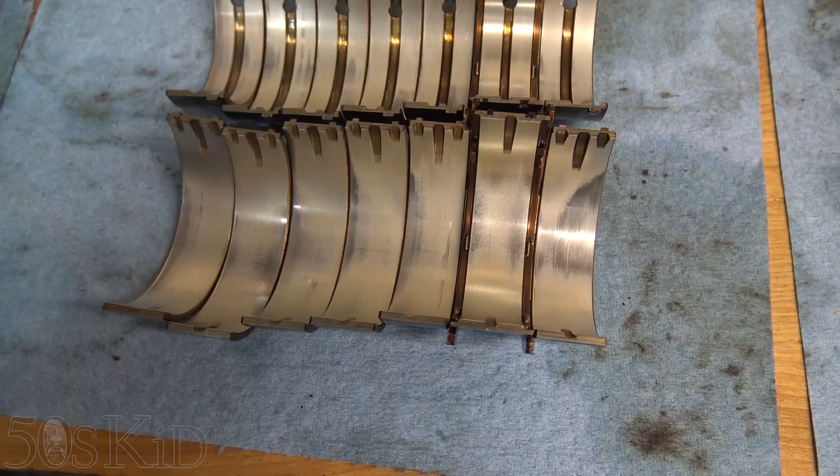So let's get started. We're going to start by examining the main bearings. This is main bearing number 1, closest to the front of the engine. Number 7, closest to the rear. These are the lower bearings. As the engine sits upright in the car, these bearings are on the bottom. These ones are on the top. So number 1, this is basically where the little tangs are. This is the exhaust side of the engine. So basically the tangs always match up.

So I've split them open like this and unfolded them. That way you can tell, when you look and you see this sort of shiny wear on a side, if I were to flip the bearing the wrong way, it would actually look like tapered wear had occurred, as if the crankshaft had been bent, but that is not the case. You've got to keep your bearings oriented correctly and realize that this is the front of that same bearing. When they were together, they were like that. So it's important to keep your orientation correct.

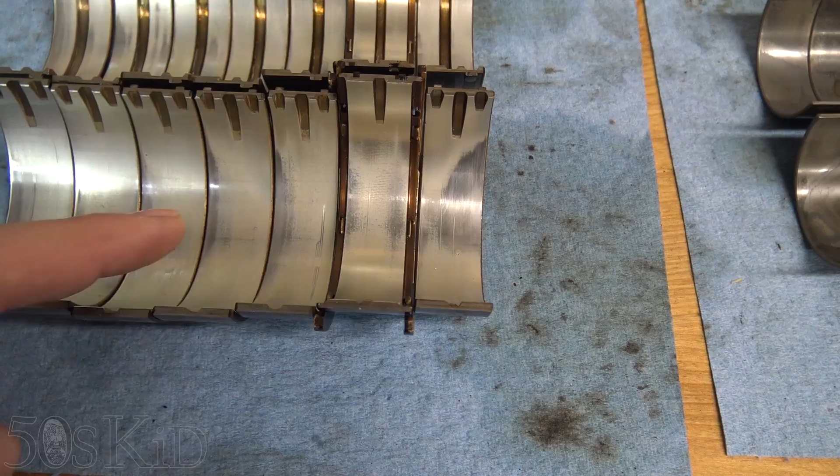Now, one thing you want to look for overall when you line up your bearings like this is more wear in the center bearings, particularly the most center bearing. More wear there than the others. If you see heavy wear along the center, that's evidence of a bent crankshaft. But I'm not seeing that here, so that is very good. This shiny wear, on a normal kind of bearing, would actually indicate oil starvation. However, these are actually aluminum bearings, and this shiny area is just the normal wear pattern for them. So I'm not too worried about oil starvation issues.

The only thing I'm really worried about are 2 things. Number 1, you can see that there's a little line right here, and I can actually feel that groove with my fingernail. So obviously foreign material got in there and caused that groove. And there's another little one right here that I can barely feel with my fingernail. I'm worried that that foreign material might have also damaged the crankshaft's journals, so I'm definitely going to inspect those pretty closely. The top bearings are better than the bottom bearings because the bottom bearings take the major thrust load.

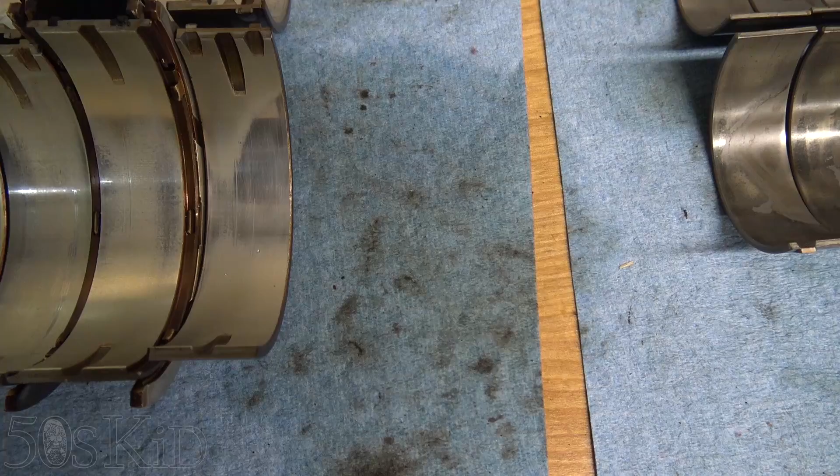The other thing I'm really worried about is this bearing on the end here. That's just kind of an unusual wear pattern that I'm seeing there. It's way heavier than all the rest, obviously. But at this point, I'm hoping that was probably caused by the damage to my transmission when the oil pump bearing spun out on my transmission. I guess that was earlier this year, so I guess that was a year ago.

What would have happened is the torque converter, you see the end of the torque converter bolts here, and the other end of the torque converter is sticking into the transmission here, and it's riding in that bearing. So once that bearing spun out, the torque converter might have been able to oscillate this way. I'm thinking maybe it was oscillating and gravity was pulling it down, and that's what caused this wear pattern here. So that is my theory about that. I have no idea if it's correct or not.

The next step from here is going to be to examine the crankshaft and see if this wear pattern has caused any kind of tapered wear on the crankshaft or anything like that. But we will do that in the next step. So before we go there, we're going to take a look at the connecting rod bearings next.

So these are the connecting rod bearings, again, number 1 through number 6. These are the cap bearings. So again, up in the car, these would be on the bottom. These would be the lower half of the cap right here. And these would be the uppers. And I've labeled each one. Very important to label each one, by the way. So those would be the uppers.

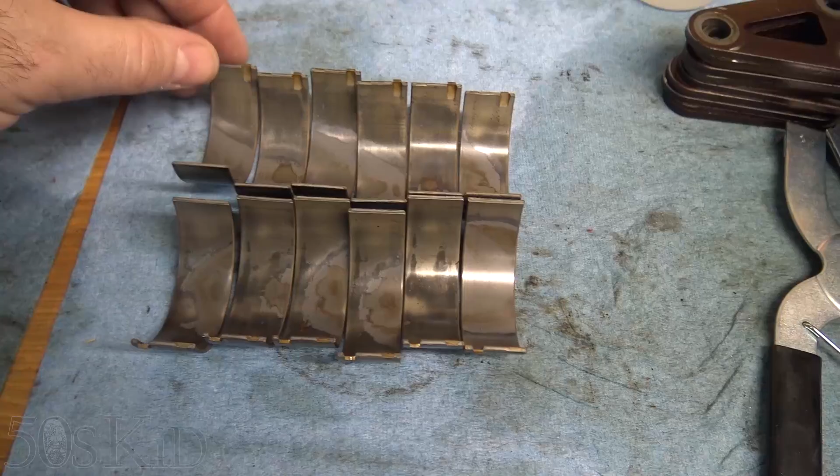Now, when it comes to connecting rod bearings, the uppers are the major thrust surface, so you should expect to see greater wear on those, which you'll notice I don't really have greater wear on those overall. In fact, on this one, for example, the wear is greater on the bottom one. So that kind of doesn't translate to my particular set of bearings here.

Again, I've kept them in orientation the same way, which in this particular case is extremely important because, as you can see, the biggest problem that we're seeing here is the tapered wear across all of these bearings. You can see they all have tapered wear. It's tapered this way, except this one. This one doesn't really have it. It's showing sort of a different kind of wear over there, but this one, even though it looks like it's even up here, you can still see there's taperedness on that bearing as well.

And we also see the taper on the upper bearings as well, and you'll notice, because I've kept them in orientation, the taper is going the opposite way. So whereas it's tapering out this way on that bearing, it's tapering out this way on that bearing. So when this bearing was like that, you can see that that's the wear there, but then it was just the opposite on here.

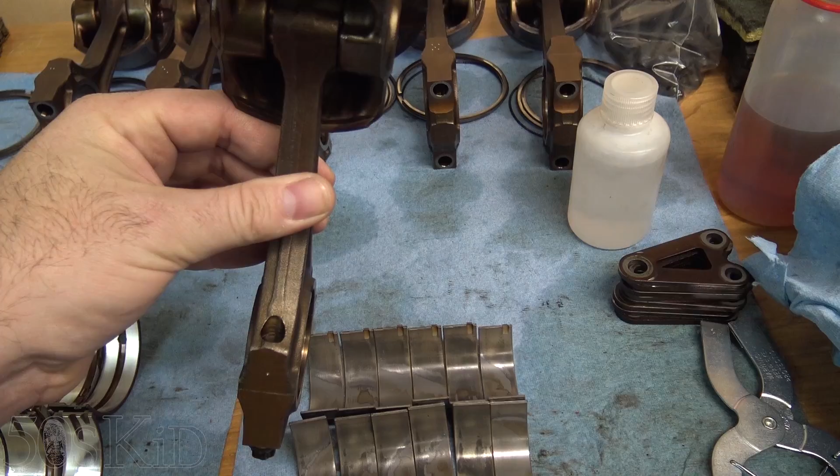Now, what this means is that very likely this connecting rod got bent this way. Is that the right way? Actually, no, it would be this way, because that bottom bearing would be pressing up against the crankshaft here. And then that top bearing, you see the wear pattern is on this edge. So that top bearing would be pressing down on the crankshaft this way. So this is a very exaggerated version of what happened, but this connecting rod, and I think all of these connecting rods, probably got bent this way somehow. So that is the situation that these bearings are telling us.

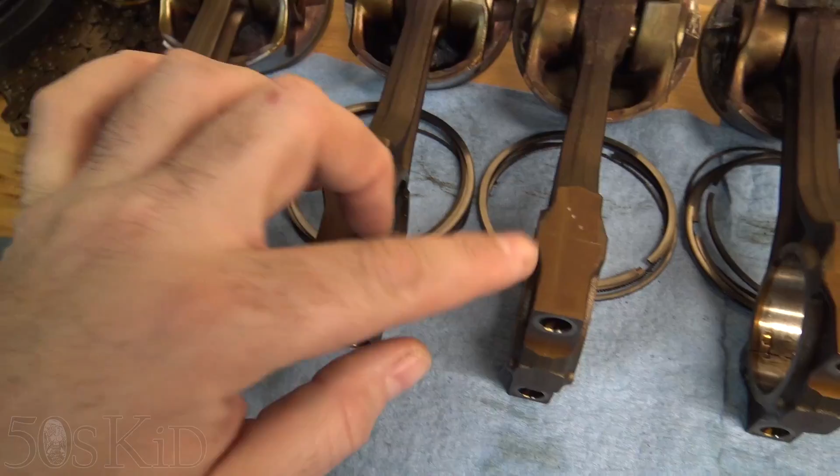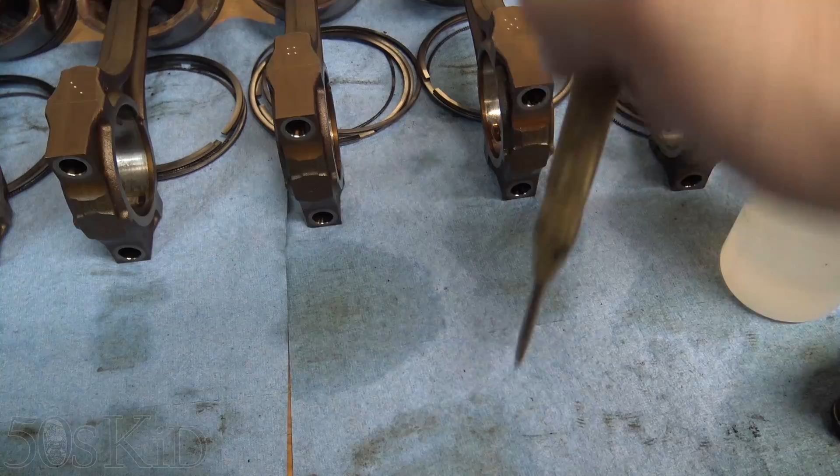And you'll notice that I've marked the connecting rods. They've got these little marks here, and I made that just with an automatic center punch right here. You just hold it down, press it down, it releases a spring and it makes a little punch mark. It's for when you're drilling in metal, you can make a little dot, and that way your drill bit won't walk. So you can use one of these to mark it.

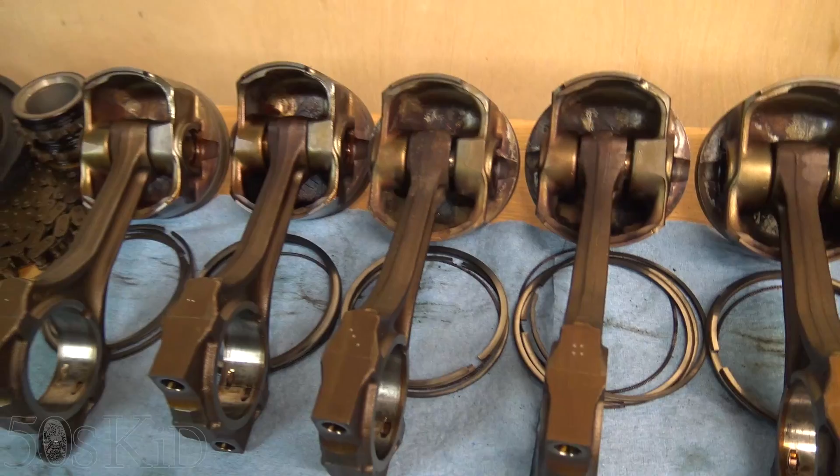There's probably going to be debate on that. After I did this, I finally found a paragraph in my engine rebuilding book that said beginning machinists do this without realizing that it could cause stress risers in the connecting rod. I don't know if that was just powdered metal rods only or what, but I have seen this done in many other places, so I don't know. It's up to you whether you should do it or not. You can always just use a Sharpie, and then when they get clean, somebody can just re-Sharpie the number on them if you just don't want to mix them up.

By the way, guys, in case I didn't mention it, all these bearings are getting replaced. If you see any shiny areas on an aluminum bearing, or if you see any kind of wear pattern like this on a connecting rod bearing, which I think is a tri-layer bearing on these, time to replace them. Bearings are your wear item. Bearings are what get replaced.

We need to get the connecting rod off of the piston. Luckily, these are not pressed in. They're free-floating piston pins or wrist pins. There's just a little circlip in here that you need to get out. So you can just sort of pry that sucker out.

And you should be able to press it out, but of course the built-up varnish might give you issues, so you can just knock it out with a little hammer if you need to. So here we go. We need to figure out if it's bent or not.

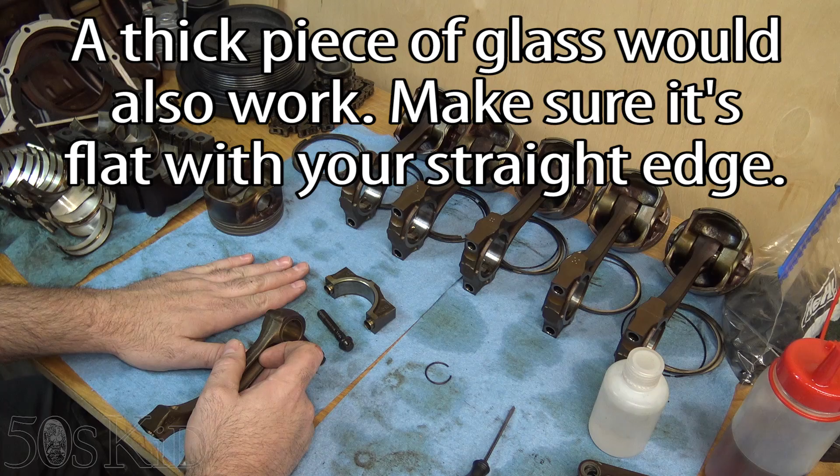And when I say machined surface, I mean a metal, like a cast iron machined surface, such as the surface of my table saw, or I could have used my jointer as well if it wasn't packed away, but you're going to need a machined surface. So let's go use my table saw and see what we see on this connecting rod.

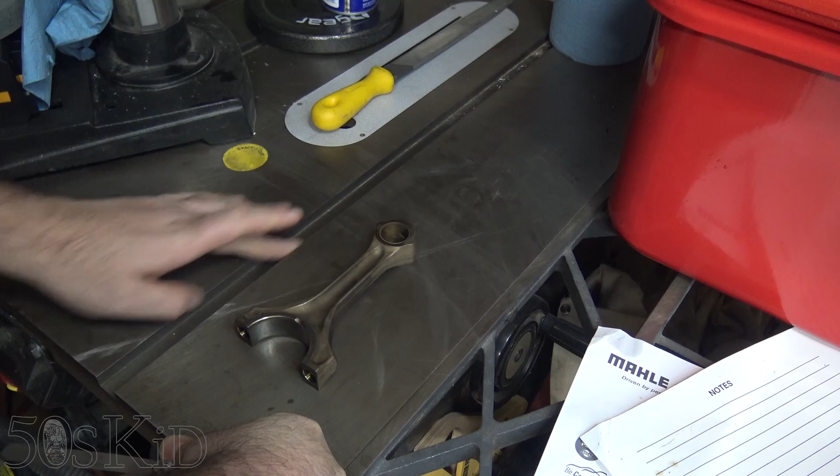Okay guys, so this is a little interesting. I always go through all these things when I'm doing these videos just to make sure that I know the direction I'm going in for the entire video. So obviously I've checked all of this before, a couple weeks ago actually. And when I checked this connecting rod on my table saw here, I noticed that there was a rocking in it, which you can sort of hear.

And if I press down on this end, you can see that I can get a 1.6 thousandths feeler gauge in there on the bottom like that. And if you turn it over, can't really get it in. But I'm realizing that when I move it up here, I don't get the same effect. And there's no rocking sensation over here. And when I just checked this now, this is what I saw.

And I figured it must have been because it's so cold here in my workshop. I'm shooting this at night right now, and it's winter time. So I figured the temperature change was affecting the metal somehow. Metal expands when it gets warmer, just like everything. So I soaked this connecting rod in hot water for a couple minutes and heated it up, then checked it again, and I found the exact same result you just saw. At this point, this thing is room temperature for inside your house.

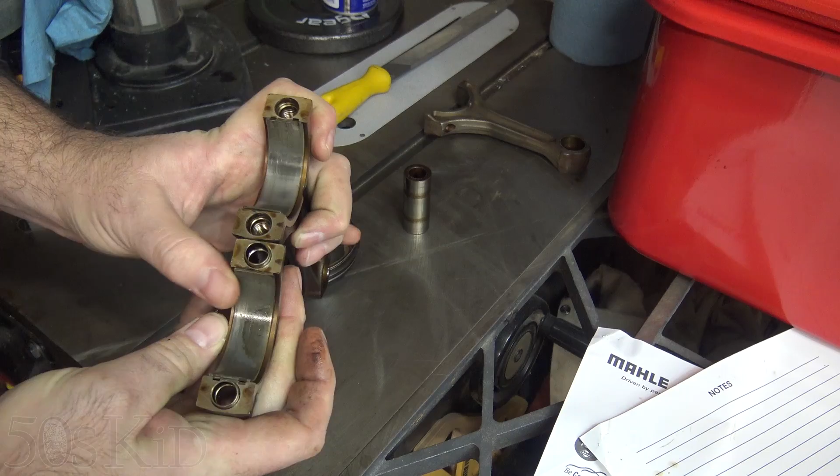Okay, so here is number one connecting rod and piston from the used engine that I purchased. And the most interesting thing to me about this is the bearing wear. Take a look at this. You can see that on the bottom cap, we've got tapered wear right there. But on the top cap, the wear is completely even. So that's, again, really interesting. This came out of a 528, I believe. Same pistons, by the way.

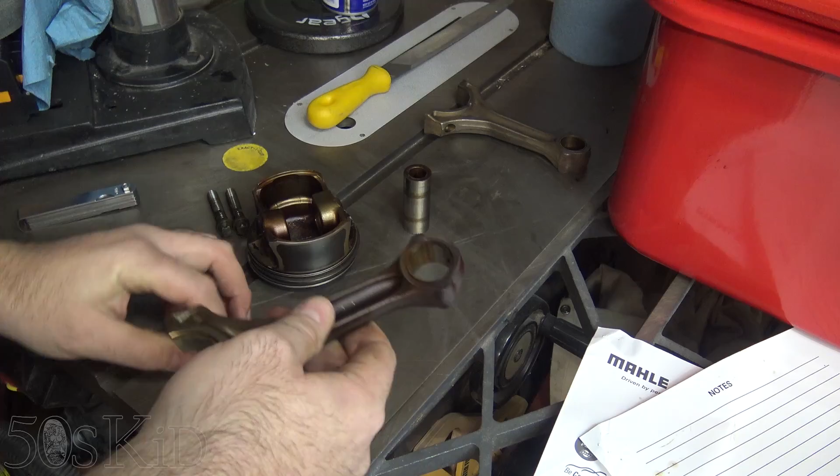528, 328, same connecting rods, I should say, as the 330. Different piston, same connecting rod. But that was the wear pattern. And what I did in the junkyard was I took these connecting rods, and the only machine surface I actually had was the engine that was flipped upside down. So I just put it on the edge of the engine where the oil pan gasket goes.

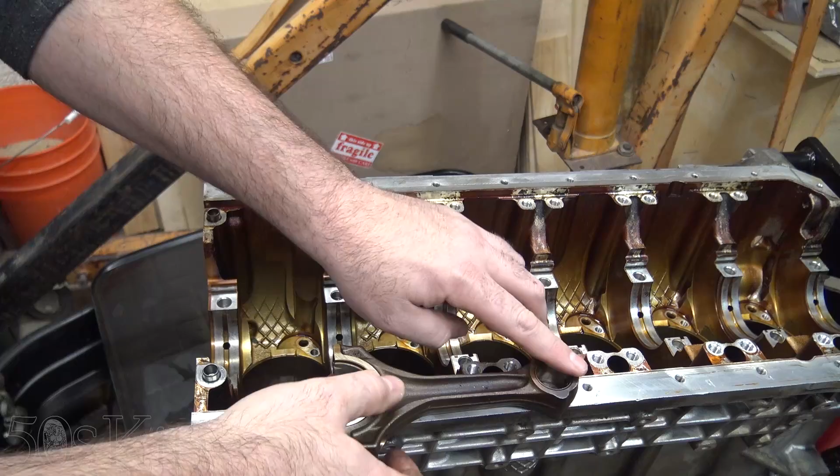Let me show you that. So I did this in the junkyard. I just sort of put it on this machine surface and tried rocking it, and didn't see any rocking out of these. So I assumed these were good, and I bought them specifically because the upper bearing had completely normal wear, and this is the thrust surface. So I guess at this point I might not be using these based on what I'm finding.

I'm going to go ahead and check every single one of my original connecting rods and just make sure that I'm not getting any rocking out of those. And then what I probably should do is put my straight edge on my table saw there and figure out if we've got any taper on that surface at all.

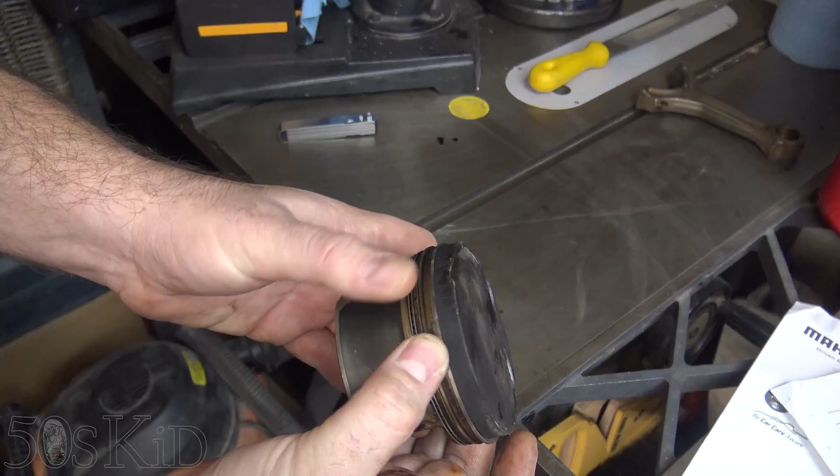So let's do that. By the way, quick look at these pistons that came out of the 528. Hopefully you can see right here, there are lots of vertical scratches along the skirts of the pistons, and it's like that on all of them. These pistons are in much worse shape than mine were. So, quite interesting. Of course, if you have any vertical scratches like that on your piston, junk it. It's junk, you need new pistons.

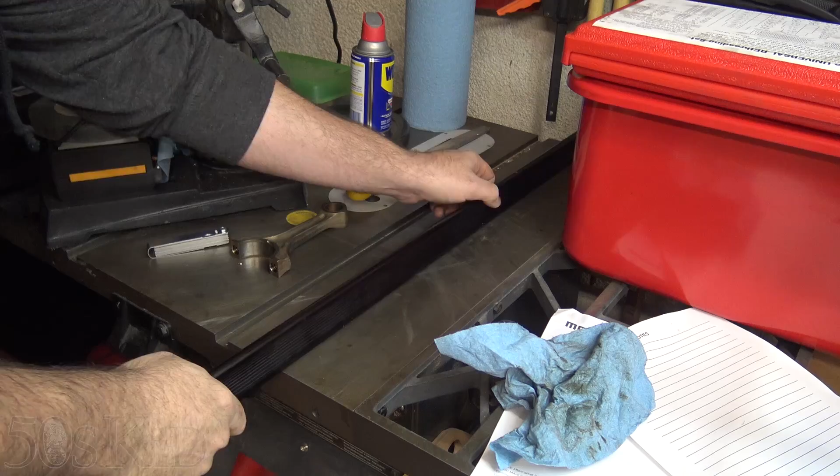You know guys, I could swear I remember checking this surface with this straight edge to make sure that I did have a straight surface. I mean, look at that. Hold on, let's do that this way. You see, this feeler gauge is not going through. It's going through there. So, if anything, we've got a little dish in this area right here, all the way to here. Yeah, that's right. That's what I remember from last time. This is actually ringing a bell.

And then it gets through back here in some areas, but then it doesn't want to get through up here. That's interesting, because you can't really tell based on that, well, I guess you can. If we're comparing outside edge to outside edge, over here we've clearly got a pretty flat surface all the way to there. So if I'm just checking the connecting rod here, I can't get the feeler gauge through. Okay, I'm remembering that. Let's assume that this is the flat surface, because that's the flat surface right there.

So yeah, see, that's what I was doing. You just saw right there, using my flat edge and a feeler gauge, that this area right here is definitely flat. I couldn't get a 1.6 thousandths feeler gauge in there. But now if we put the connecting rod there, you can clearly hear the tapping. It's very, very slightly bent that way. So if I just hit it here, I can get the 1.6 thousandths in. Just barely though. It's a very, very small amount.

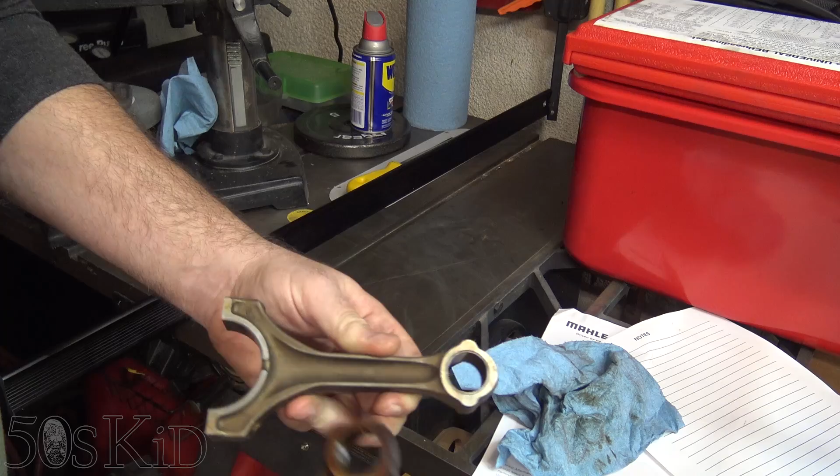I almost feel like putting this in the water too, because that water actually cleaned off the surface varnish, did a pretty good job. I'd have to heat the water back up, but let's go here. See, nothing there. Nothing there. So, okay, right there.

Physical evidence. We have it on camera that this connecting rod is absolutely better than this one. This one has a very small bend in it. Very, very small, but big enough to actually cause tapered wear on its bearings. So cool, I did not waste money. I'm very happy, and you guys saw it. Proof positive. This is number 2 of my old connecting rods, ones that came out of my engine.

There wasn't actually tapered wear on these bearings on number 2, if you recall from that scene a couple minutes ago in the video. This one didn't really have that kind of wear. So I'm not surprised that it's not exactly bent. See, it's fine. This one seems to be fine. Maybe there's a very, very small amount there. Yeah, you can get that feeler gauge in right there. Very small amount.

Here's number 3, old bearing, old connecting rod that came out of the engine. Let's figure out which side is which. The numbers that are stamped into the connecting rod, that's the exhaust side. And I do believe that the taper was coming this way. So we should find that it's that way, which we do. So if I'm putting my exhaust side here, which is the numbers that are stamped in, not the numbers that I stamped in, not the little 3 dots, that's the intake side because there was nothing there.

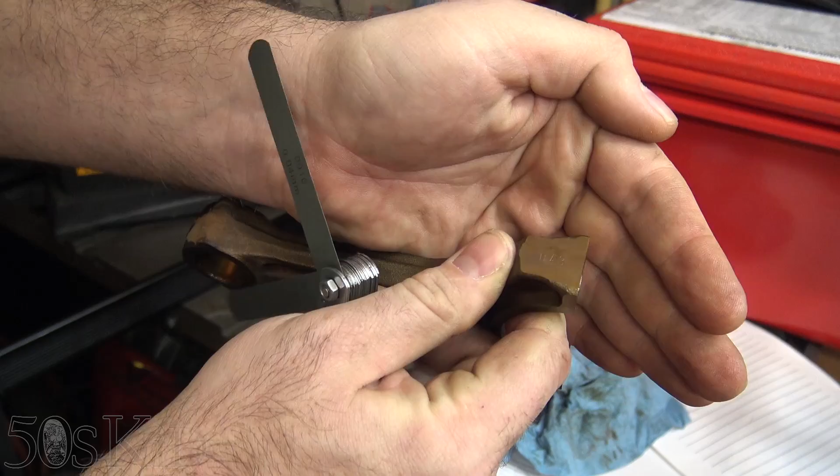On this side, there are numbers that are stamped into each connecting rod, and there are matching numbers on the cap. That's the exhaust side. So if I'm putting that side here, that's the side that's going to rock like that. And I am consistently finding that it's towards this side, which is, you know what I'm going to say, interesting. Let's get the other 3.

Okay. This is number 4, and we expect it to be on this side. There we go. And if you were to check it on that side, there we go. We can clearly see that one is bent as well. Number 5. Same thing, not as much there. Number 6. That one's not as much. That one I can feel more drag right here. But yeah, once I get in, then that's it. So it's a very, very small amount. Very slightly bent.

I'm absolutely certain that they can correct this at the machine shop. The reason that I chose not to do that is because it was probably going to cost too much. I didn't spec it out, but the cost on buying those used connecting rods from the junkyard was like $14 each. It was just the connecting rod and piston together. So I figured that they were probably going to charge me more than that at the machine shop, and even then I didn't know if that would weaken the rod at all.

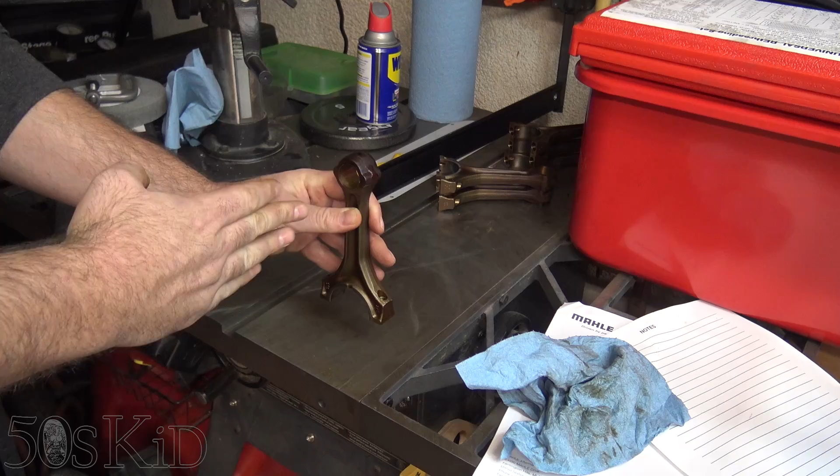The procedure they would use to bend it back is they're going to put the wrist pin back in, clamp it in a vise, and literally put a really long hardened rod in and just use leverage to bend the thing up past the middle point, and then it'll spring back to the center. And then they would use that fixture that I was talking about to measure it and make sure that it's perfectly straight again. So I didn't want to opt for that because it was particularly easy or cheaper to get a used set of connecting rods. So that's what I opted to do.

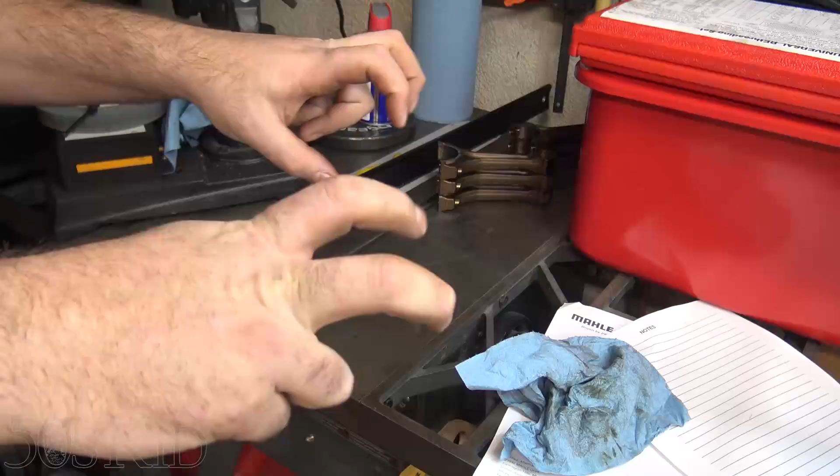I did check each one of the new connecting rods in the junkyard using that method I showed you. I used the machined surface of the engine, but I suppose we should go ahead and check every single one on here just to be absolutely certain, even though I did check all the bearings, and most of the used bearings all look the same, where the cap bearing had that tapered wear on it, but the top bearing did not, which again, I find really, really strange.

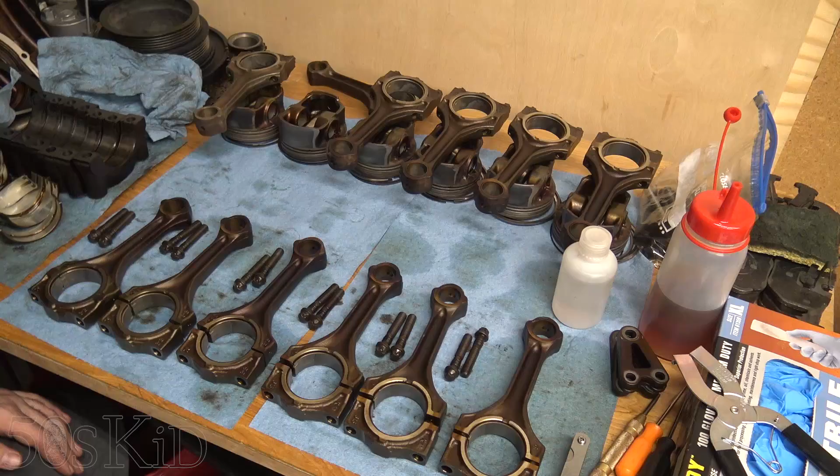I do not have an explanation for that at all. I will freely admit I don't know enough to know what the explanation is. Something to do with the twisting forces inside the engine. I have no idea. But I will check each and every one of them on this surface here and make sure that they are good before I put them into service. Okay, I have checked all of my new connecting rods and they are all good. So cool, that problem is solved.

Basically everything up here is just junk because I'm getting new pistons. They come with new wrist pins, new clips, new piston rings, and here are the new connecting rods. So literally all that's junk, but of course I will never throw it out. I'll stick it in a box somewhere because I'm that kind of pack rat.

I just want to mention something. If you're reusing your pistons and you go to clean them out and dunk them in chem dip or solvent, you need to take them completely apart, because you can see this little varnish area right here. This is the part that's actually exposed when it's in there. And if you don't take them apart when you clean it, some of this varnish could actually flake off and then get in between the wrist pin and the bearing surface inside the piston, or the bushing inside of the connecting rod, and that could actually cause it to jam up. So you definitely need to disassemble everything before you dunk it in solvent to clean it.

So let's move on to checking the crankshaft next. Make sure that none of our bent connecting rods actually wore a taper in the connecting rod journals on the crankshaft itself. Hopefully all of the damage was contained to the bearing. I think that it might be. And we want to scrutinize the number 7 journal and make sure that this particular wear right here didn't cause any kind of a tapered spot on the main bearing journal on the crankshaft. So let's take a look at that next.

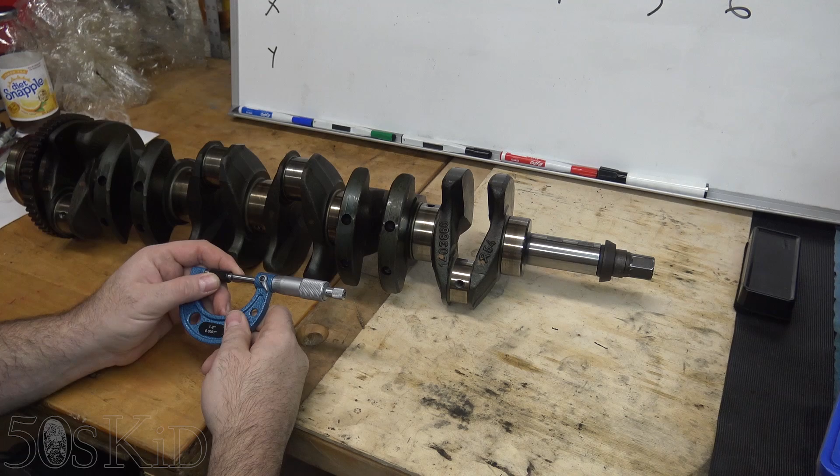I'm actually reshooting this video because the first time I shot it was at night and everything was really cold to the touch, and it's wintertime right now. And the measurements I was getting were smaller than when I first mic'd this crankshaft a week or two ago, when I first did all of this stuff just to see what was what. And I realized that that temperature difference actually changed things quite a bit. So I'm reshooting this. It's warmer now. It's during the day. This is a warm day.

It's like 73 degrees outside, and I've actually had the crankshaft in my house, wrapped up in plastic, wrapped in a blanket, just making sure it's room temperature, because that's what you want. You want to have it at room temperature. You don't want to have it freezing cold to the touch or anything, because there was a significant difference. It was 3/10,000ths smaller on the crank pins, and I think 2/10,000ths smaller on the main bearing journals. So pretty significant. So we're just going to go ahead and reshoot this part here.

Now I'm making sure that my outside micrometer is zeroed with my standard, which is a good idea to do every time you do this, because again, temperature changes. You want to make sure that you know what your equipment is reading, and correct it if that's your choice, and or write down the error, and that way you can subtract the amount of error from your measurement. So in other words, if you were to put the standard in there and it was reading 1/10,000th instead of exactly at 0, then you need to subtract 1/10,000th from your measurement. In this case, I was micing my standard, and then I just readjusted the micrometer to 0. And if you want to know more about this, just check out part 1 of the Blueprint series if you haven't seen it.

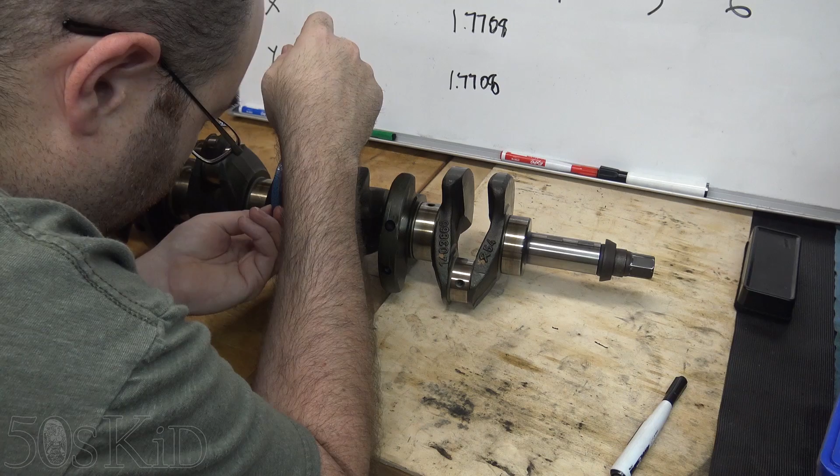So now I'm going to check the sides to make sure that they're not smaller. And I want to make sure that I don't come too far to the side, because there's actually a little radius right here in the corner. It's called the fillet. There's one on this side and one on that side. So you want to make sure you're not actually touching there. You just want to be right on the edge of the shiny part, which you can clearly see. So let me make sure I get in the right spot here. .7708. So that's good. No barrel-shaped wear on that side. Let's double check this side.

.7708. And just to cut to the end, when I did this last night, there was no tapered wear on any of the journals at all. So I'm not going to bother to recheck them again, because I know it's going to be exactly the same. So no tapered wear, even though those bearings were tapered. It looks like the bearings took all the damage and didn't actually damage the connecting rod journals, the crank pins. So really happy about that. I'm going to mic up all the rest of the journals, write the numbers down on the board, and we'll see where we are.

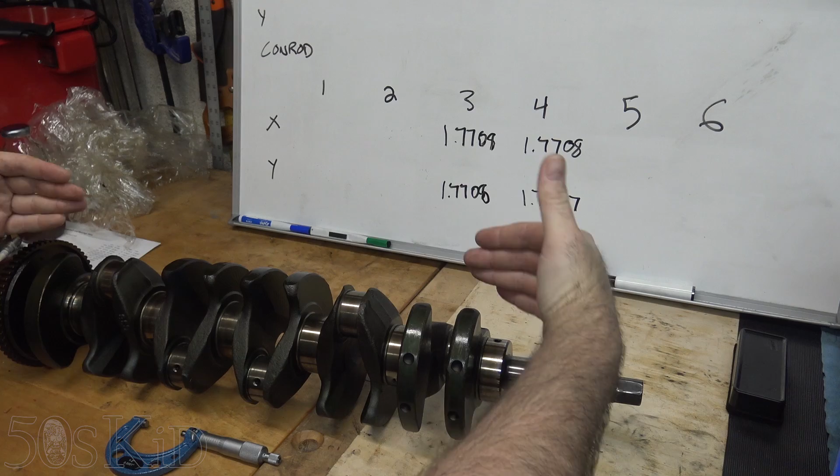And I just want to mention one other thing: when I take the measurements of each of the crank pins, I'm turning them so that they're vertical like this, just to keep some consistency for me, or just to make it easier, I guess. There is no top and bottom to a crankshaft. And I hope it goes without saying that you should wipe off these connecting journals with a lint-free cloth before you start, because a little speck of dust will actually alter your measurement.

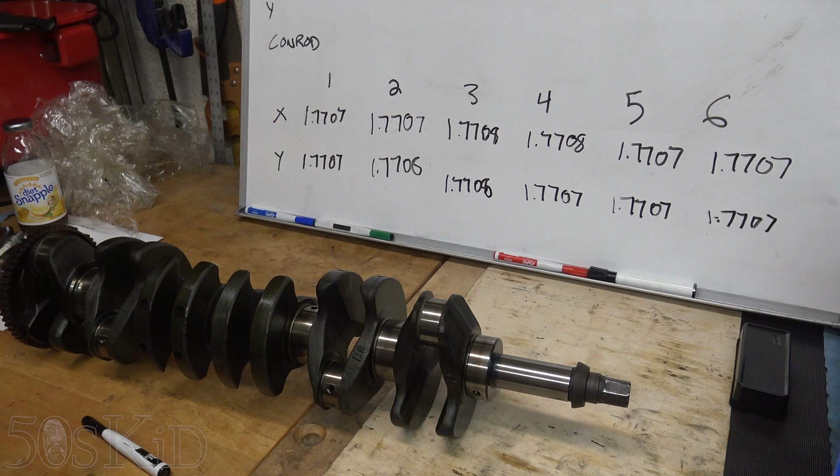So these were the results that we got for the crank pins. Pretty consistent with my first results, as far as I believe it was 2 and 4 that are showing just a very slight bit of out of round. You can see there's a difference of 1/10,000th between the X and Y measurements, which honestly you don't need to worry about at all, or I'm not worrying about at all. Anything that's less than 5/10,000ths is totally fine.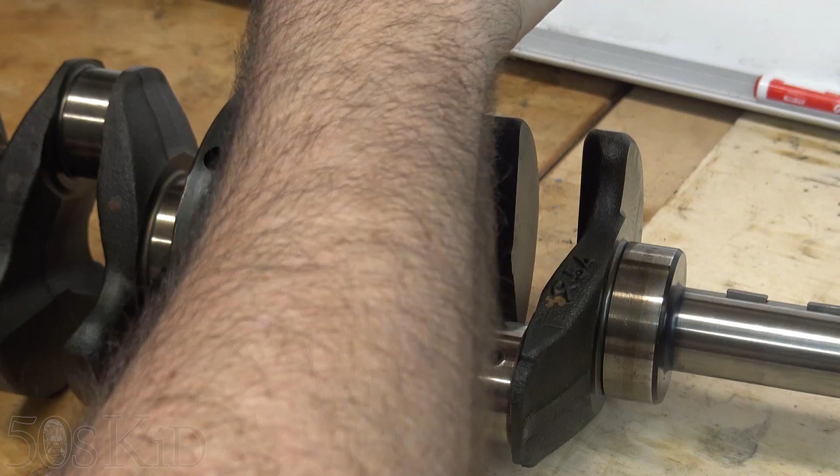Don't be afraid to take multiple measurements if you're not sure, if you're not getting consistent readings. Just don't be afraid to take multiple measurements, period, just to make sure that you're doing it right. Because this does take just a little bit of practice, but not that much practice. Once you do it a couple of times, you got it.

Yeah, so 2.3613. So now let's take the X measurement, again making sure that you're nowhere near the oil hole, which I've already done. .3613. Always good when you see consistent measurements.

Or you could also take measurements in 3 positions that are 120 degrees from each other. So you could measure an X, Y, and a Z if you wanted to. It would be an X right there, and then a Y, and then a Z or something like that to get a more accurate picture of your out of roundness. But I'm just choosing to do X and Y because I've found that this crankshaft is pretty consistently nearly perfect. Really happy with the state of this thing. I am not going to do anything to it.

One thing that I think I forgot to mention at the very beginning of the video, but with these journals, the first test you want to do before you even mic it is the fingernail test. You just want to see if you can feel with your fingernail any grooves or anything like that. Because if you can, then you want to have your crankshaft polished. But I have not felt that on any of these journals. They're all perfectly smooth. They're all really great. This crankshaft can definitely go right back into service. So I'm going to finish miking these up, and then we'll just analyze our numbers and see where we're at.

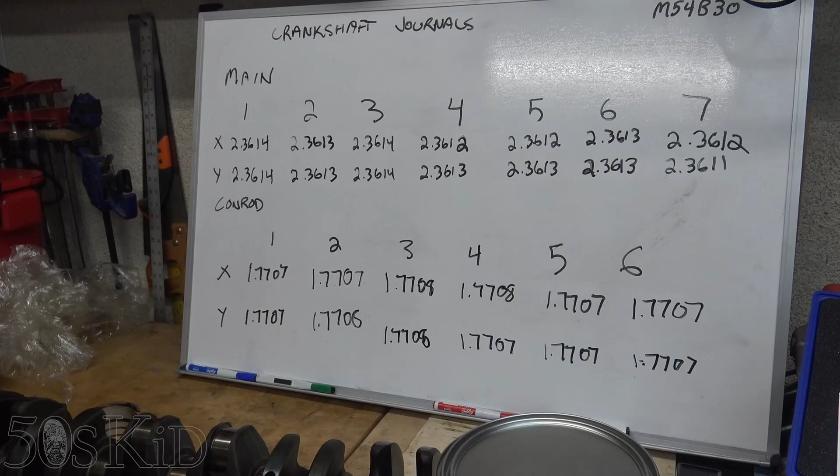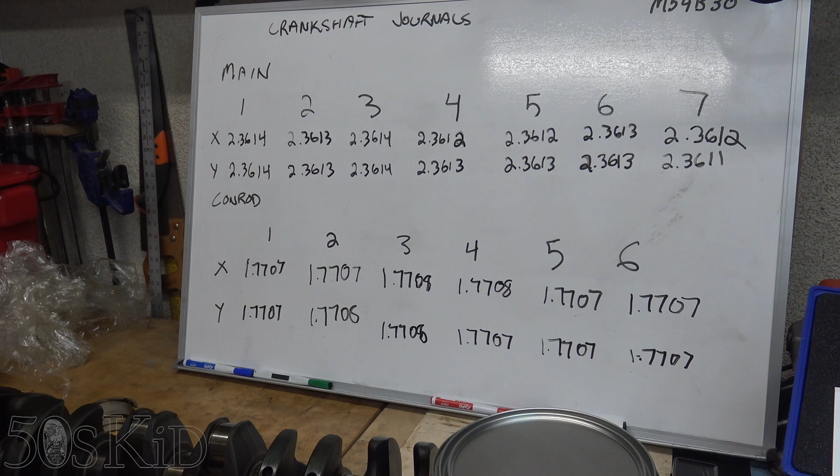So these are the numbers that I got, guys. And yeah, these are a couple of thousandths bigger than the ones I measured last night when everything was too cold. So these measurements are way more in line with what I was seeing when I first mic'd the crankshaft a week or 2 ago, before I dealt with the connecting rod problem and that whole thing and went to the junkyard and all that stuff.

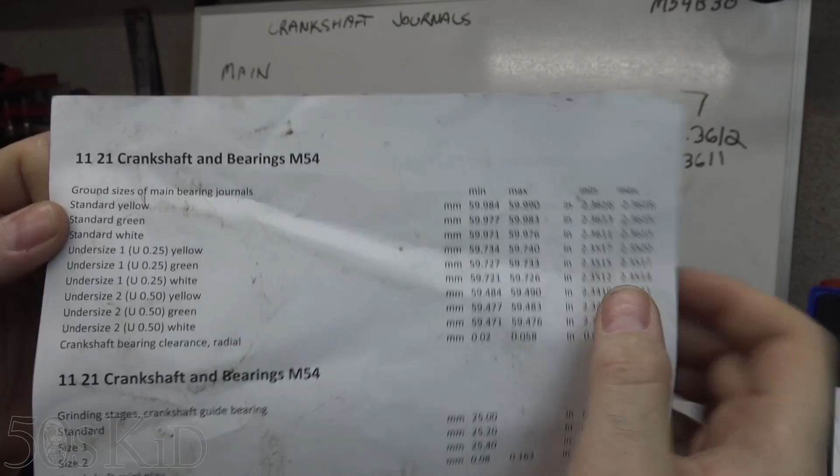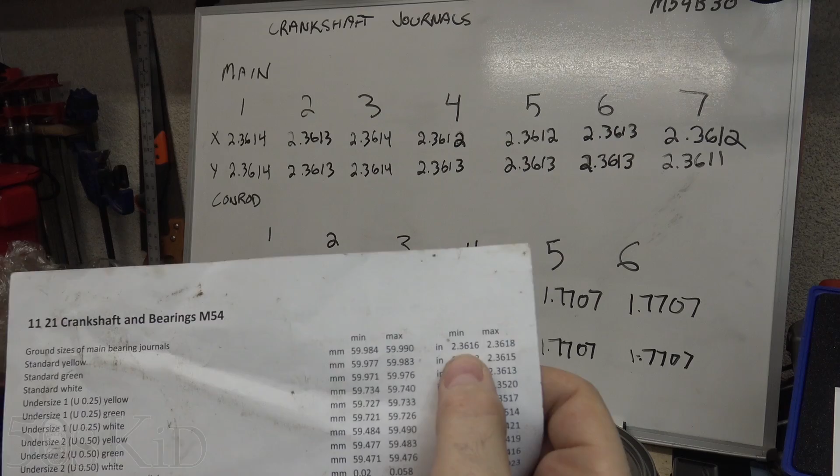The clearances for the bearing journals on the different colored bearings, if you'll notice here, we're talking about standard bearings because the crankshaft has not been reground, and you'll see the yellow bearings, which are supposed to be what this crankshaft has, because again, this crankshaft has yellow marks on it. So you can see the yellow paint marks on the crankshaft. The odd thing is that these paint marks are sort of closer to the crank pins. But the crank pins, the connecting rod bearings, don't have different colors for them. There's only one color. I mean, there is no color. So this is the confusing part.

Maybe this paint mark does not have to do with the size that these journals are ground to. There are a couple more paint marks on the other pins, or near the other pins as well. So maybe it doesn't have to do with these particular paint marks, and I'm thinking instead it probably has to do with the paint marks on the sides of the bearings, which I'll show you in a second. But let me just show you the wear for the yellow ones.

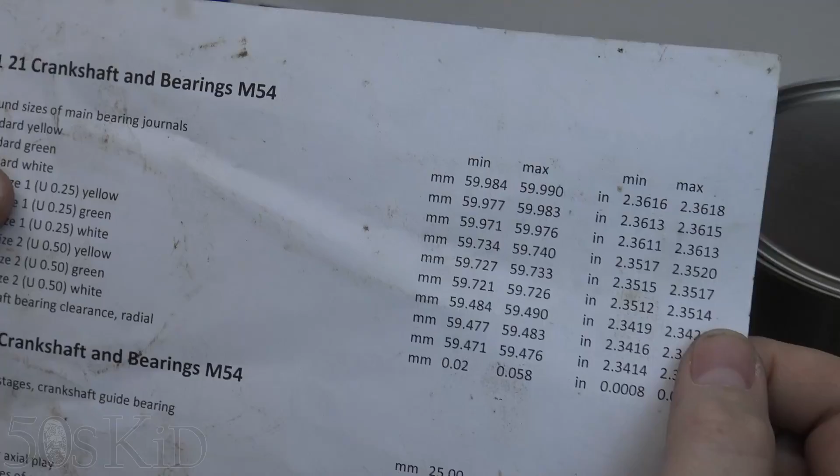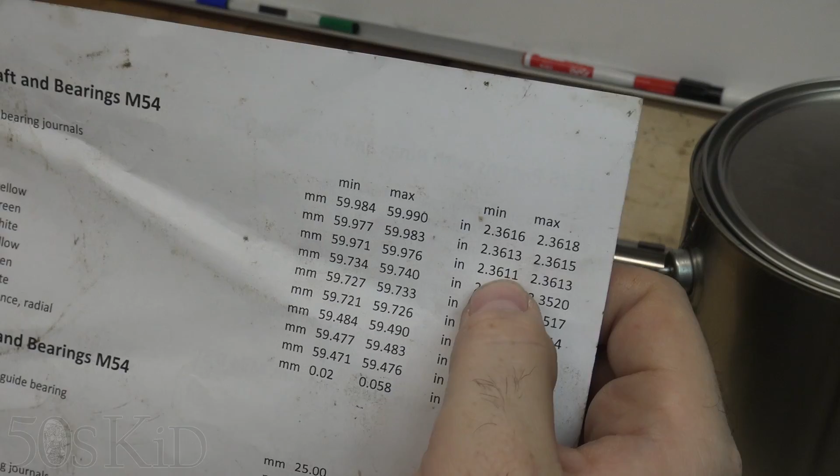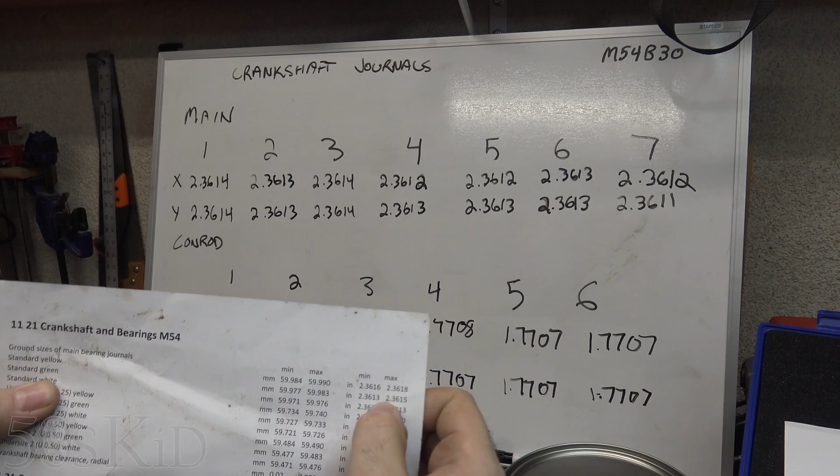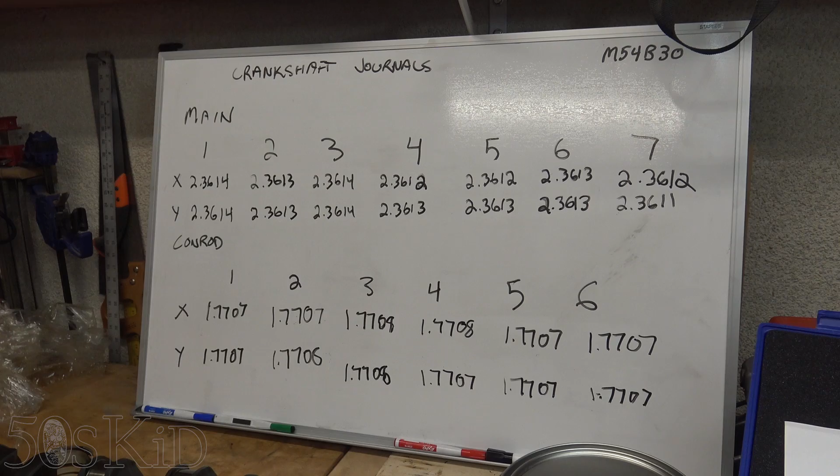So these are the sides of our bearings, and I'm hoping that we can actually see the color here. There does seem to be a color mark on some of them, and maybe this one's easier to see. Let me pull this out and kind of get it in some light.

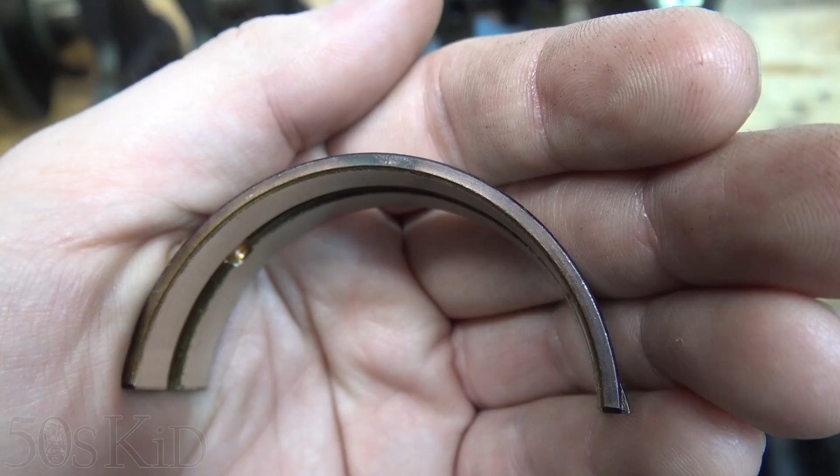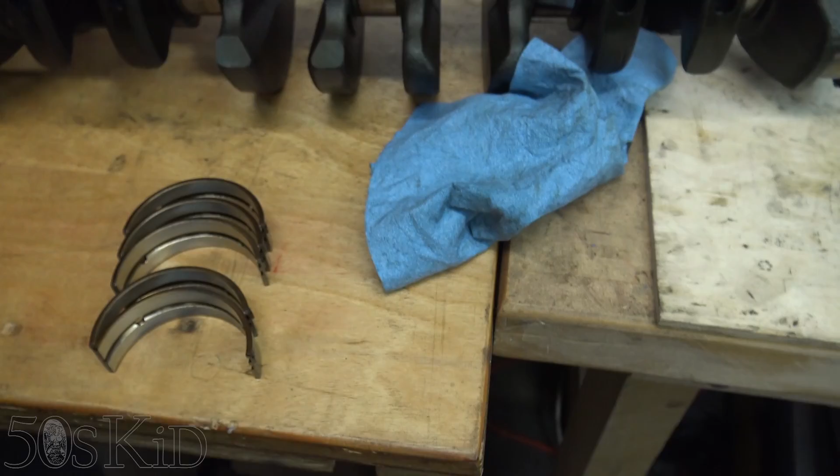You see that mark there? That looks green to me. There's no mark on the other side. It's very hard to tell because there's a lot of varnish on them, but I think I'm consistently seeing a green marking across all these bearings. So I think that means that these bearings are greens.

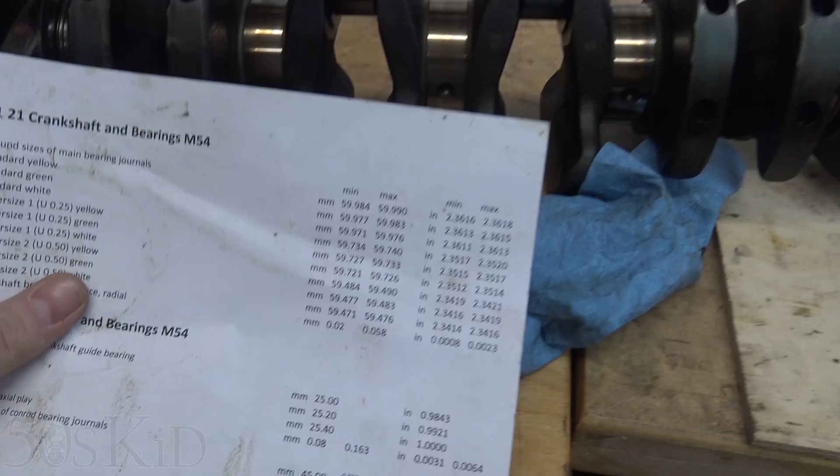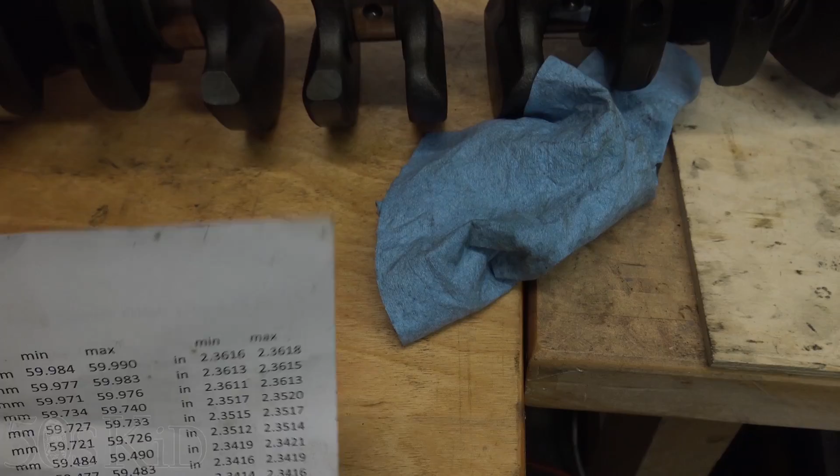And I think that means that I need to order new green bearings when I do order these bearings. I want to go ahead and confirm this. I want to see what the bearing clearance is on these bearings before I proceed any further. You see that the crankshaft bearing clearance radial is supposed to be between 8/10 thousandths and 2.3 thousandths. So I just want to verify that clearance on these old bearings before I proceed any further.

So I've put number 4 bearing shells back in and put the cap on. Bolts, I'm going to torque it with the proper procedure, which is first 20 and then 70 degrees.

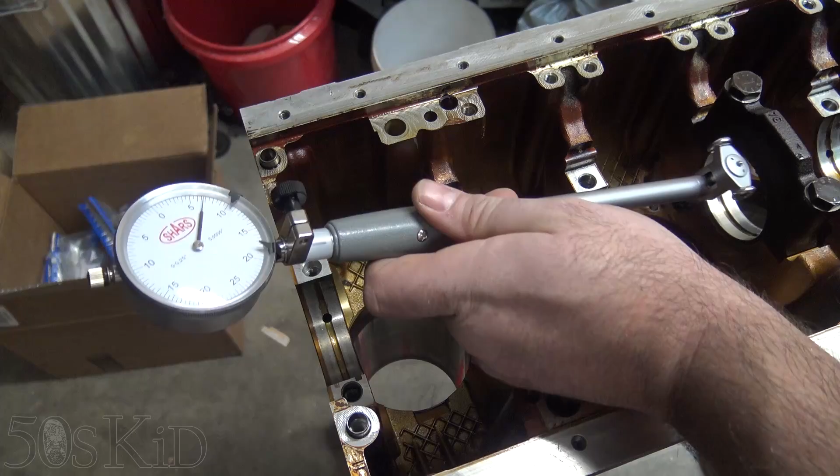So I've got my dial bore gauge zeroed out to 2.3613, which was the largest measurement I got of the number 4 main bearing journal. If you don't know how to do this stuff with the dial bore gauge, just check out part 1 of this video. So I'm going to go ahead and take a measurement here. Hold on, let's get this.

I'm going to take on both sides, because you see how there's this little oil channel right here. So there are 2 halves to each bearing. So I'm going to measure this half and then I'm going to measure that half just to make sure we've got some consistency. I'm going to do the front half first. Just get this in there. Rock this until we see it move. And you can see that we've got, well, it's less than 2 thousandths. It's 1.75 thousandths. Yeah, 1.75 thousandths.

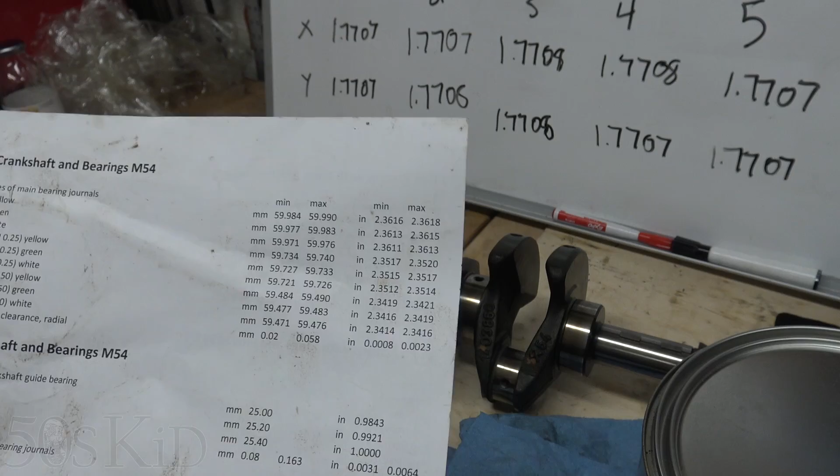And let's go over here to the other side. Tricky. So yeah, again, 1.75 thousandths of clearance. So we had 1.75 thousandths of clearance, and you can see that the range is between 0.8 and 2.3. So that would seem to be in line with what we're seeing. It does appear that these are green bearings.

So that sort of brings me to this, guys. This is a whole master rebuilding kit for this engine that I've already purchased because I did all these measurements a week or 2 ago just to figure out where I was at and what I would need to do. And basically, it comes with the oversized pistons. These are 0.5 millimeters over, or 20 thousandths. So we've got brand new pistons with new piston pins and locks as well, all the way across the board.

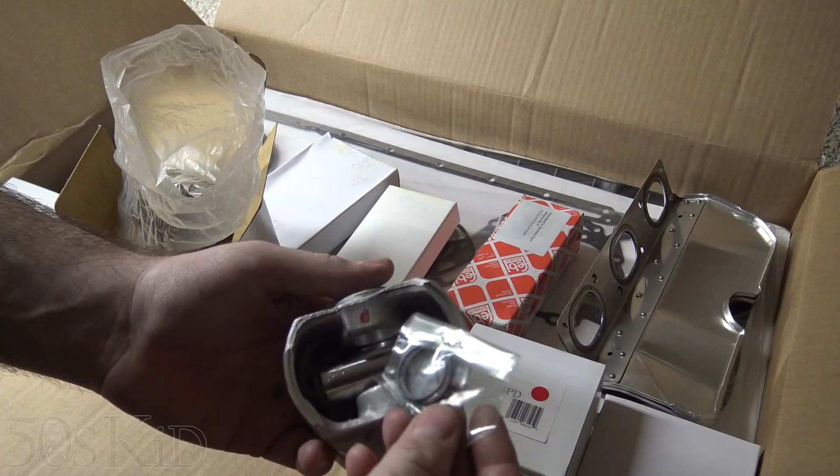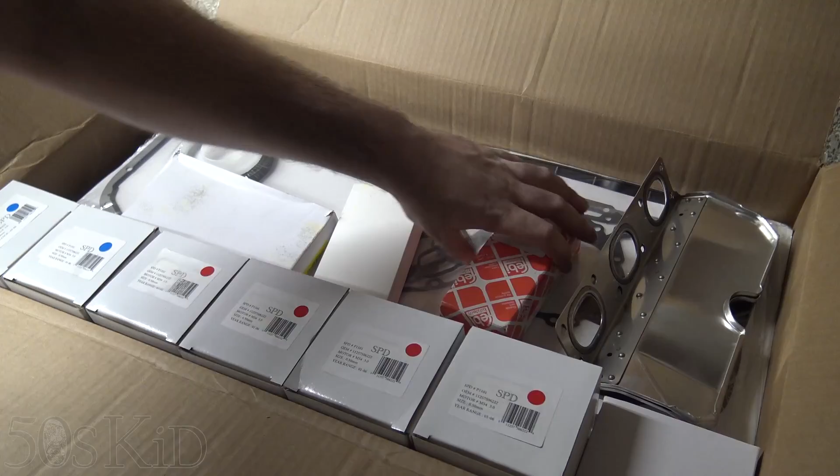So these are oversized pistons, and hopefully you can see they've got the 20 on them to tell you that they're 20 thousandths over. All oversized pistons are going to be marked with their oversizes. This is a pretty great kit. It does come with new head bolts as well, so I already purchased new head bolts before I even started the whole job, which I'm kind of bummed about, but whatever.

We got new piston rings. I believe these are Grant piston rings. These ones have the M54 style oil rings, but I've gone ahead and purchased the 3-piece M52 TU style oil rings from a different seller on eBay. I purchased oversized ones. It was the same guy that I bought my old rings from, the standard size rings that I thought I was going to be needing. He let me return them and get new ones.

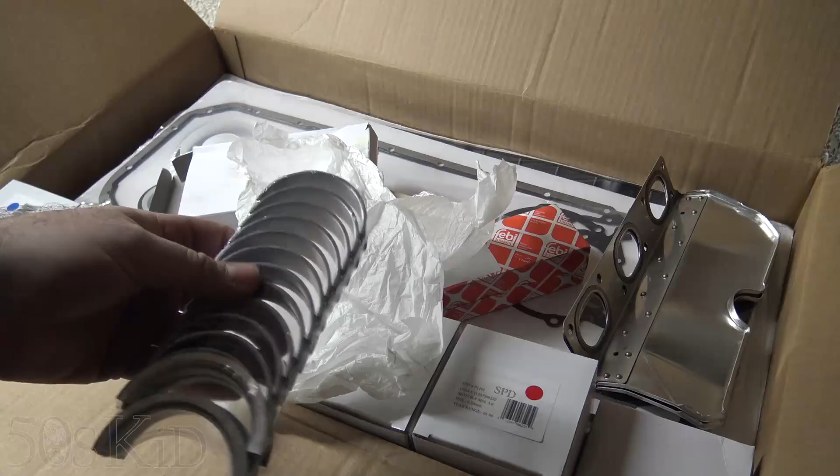This kit also comes with new bearings as well. And I was speaking to the seller, and they had a bunch of different oversizes of bearings, but they did not have the different colors with their particular bearings. So I don't know what the clearances are going to be on these bearings, because if my crankshaft journals are ground for green bearings, and if these happen to be like yellow bearings, the clearance might be a little too great with these.

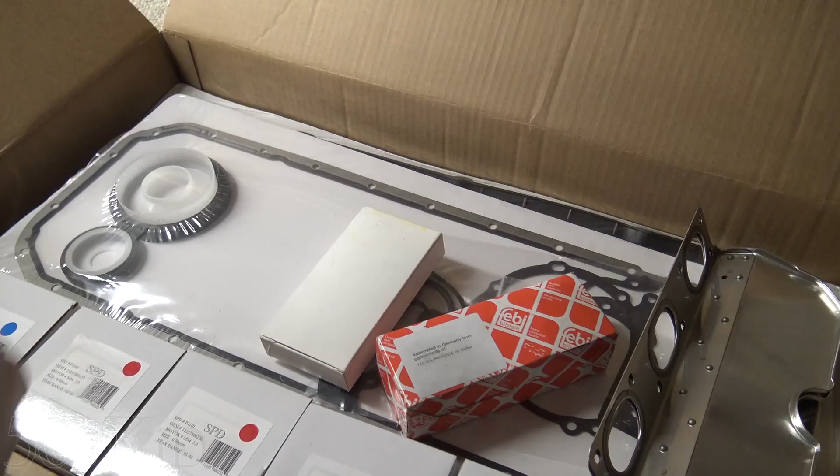So I think what I want to do is take these bearings and just measure them up and see what the clearances are right now. So I'm gonna go ahead and do that. By the way, this set also does come with every single gasket that you're going to need on the whole entire engine. It's got the exhaust gasket with the shield on it. It's got another oil pan gasket, all of the front gaskets.

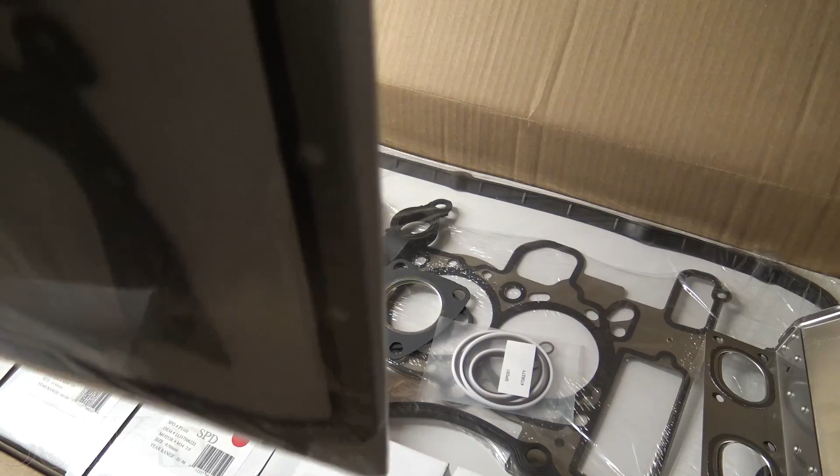It's even got the oil filter housing gasket. It's got the stuff if you want to rebuild your Vanos. It's got just every single thing, intake gaskets, all the exhaust gaskets. It has a new head gasket. It's just got everything, and it was $500. So the price was just right, honestly.

There was only one other seller. Well, this seller I could have just bought the pistons from for $300. And there was one other seller on eBay that had oversized pistons for $300 as well, I guess just a different brand. But this just seemed to be the best deal out of all of them.

New connecting rod bearings, and I think we've got new crankshaft seals as well. Yeah, new crank seals, both front and back. So you just couldn't beat this price, honestly. So I just went ahead and opted for this. So if these bearings turn out to be too big, it's not going to be too big of a deal. I'll just pick up some green bearings. I'm not too upset about it. I think I'm still coming out ahead because I just got so much with this whole deal.

Okay, so I've got one of those new bearings in there, torqued down to spec. So we'll go ahead and take a measurement of that. Looks like we've got 0.03 of clearance this time, which is too much. So let me move over to this side. Yeah, again, 0.03. Well, that's like 2.5, which is not good to have such a difference there.

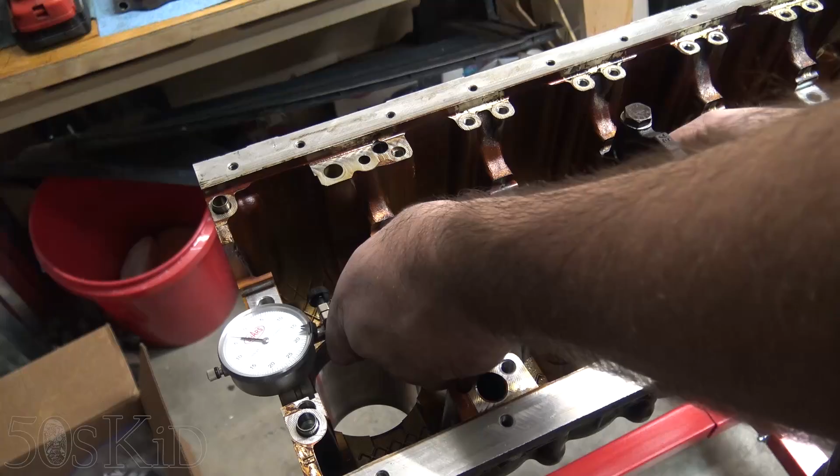Let's see if I was on it correctly. Yeah, okay, like 2.5, just a little over 2.5, or more like 3. Let's move over here, do it again. 2.5. Not happy with these bearings at all, so I'm definitely going to have to order some green bearings for this thing, just to make sure that everything's all right.

Now, I know somebody's going to drop a comment and say that I could have accomplished the exact same thing with Plastigage. And yes, you're absolutely right, but this is faster, and I happen to have these tools, so I used this tool. I will show you Plastigage, maybe in the reassembly video, just to show you how to do that as well. Yes, Plastigage is absolutely cheaper, but I have these tools to make more accurate measurements, and without outside micrometers, you can't check your crankshaft journals for tapered wear.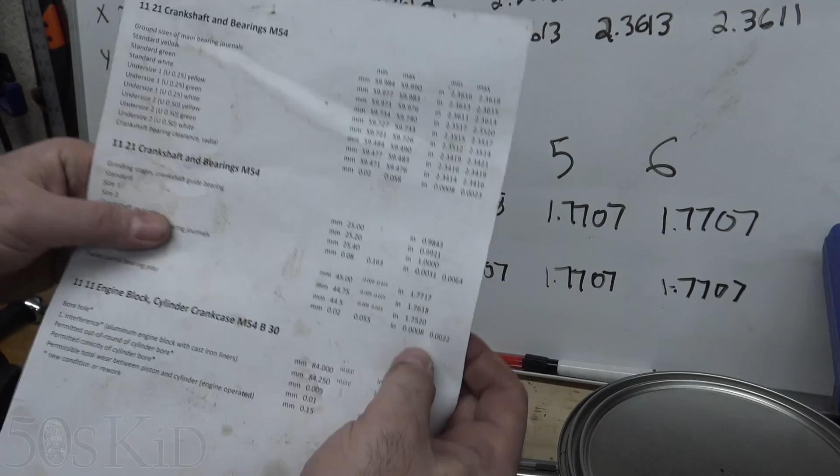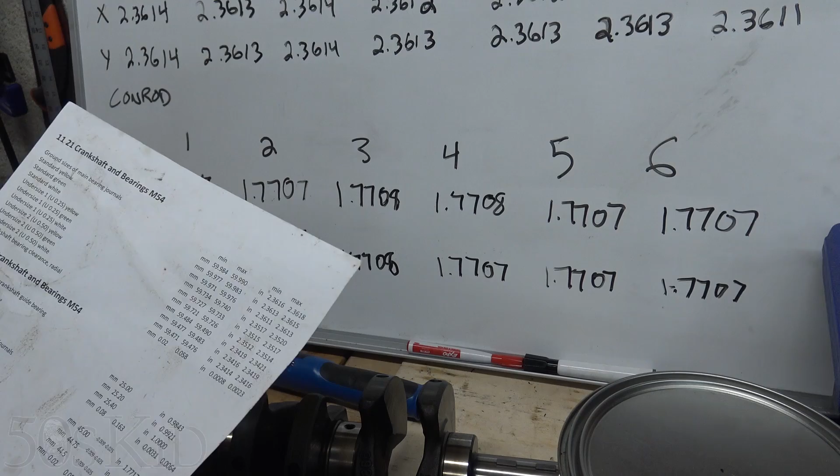So, okay, let's go back to the connecting rod journals. The original ground size of those was supposed to be 1.7717. You'll notice we are a full 1/1000th smaller on all of our connecting rod journals. So I want to go ahead and verify what the play was on the old bearing. The clearances are exactly the same, between 0.8 thousandths and 2.2 thousandths.

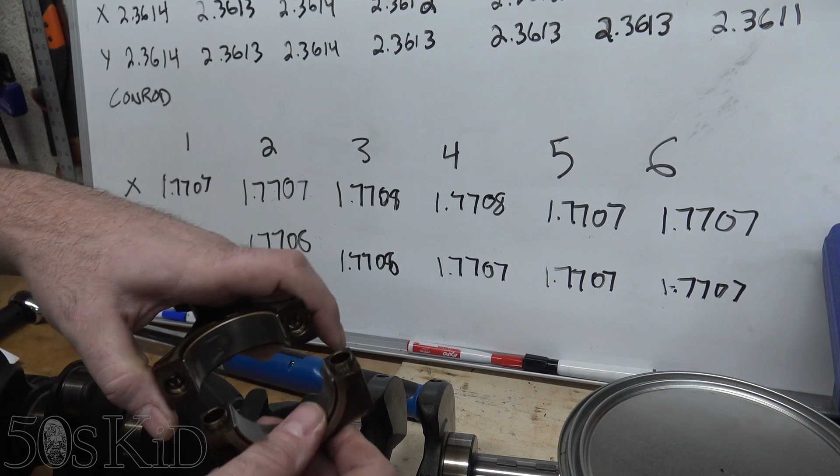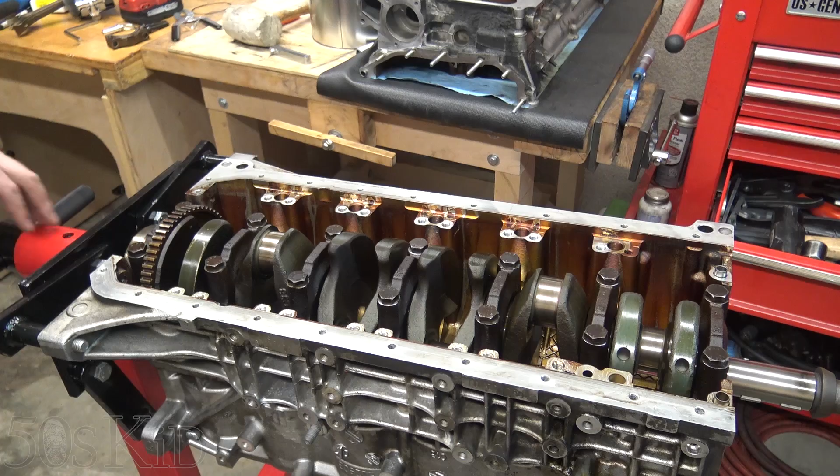So what I'm going to do is use number 5 because it had the least amount of wear. It didn't really have much tapered wear. So I'm going to measure the wear on number 5 and see where we're at with that, and then compare it to these new bearings that I got. It looks like the range on my dial bore gauge is between 2 and 6 inches, and the rod journals are 1.7 inches. So I can't use my dial bore gauge to check the bearing clearances on those. I'm gonna have to use Plastigage.

So I've gone ahead and put the main bearings back in and the crank back in and reassembled them and retorqued everything. So now the crank's in there. I've got number 5 all the way out right here, and I'm gonna put number 5 piston in. And it's actually a good idea, I'm thinking, to get some practice doing this with the old pistons just before you do the reassembly, because they say this is tricky, but I've already done it once and it's not as tricky as you think.

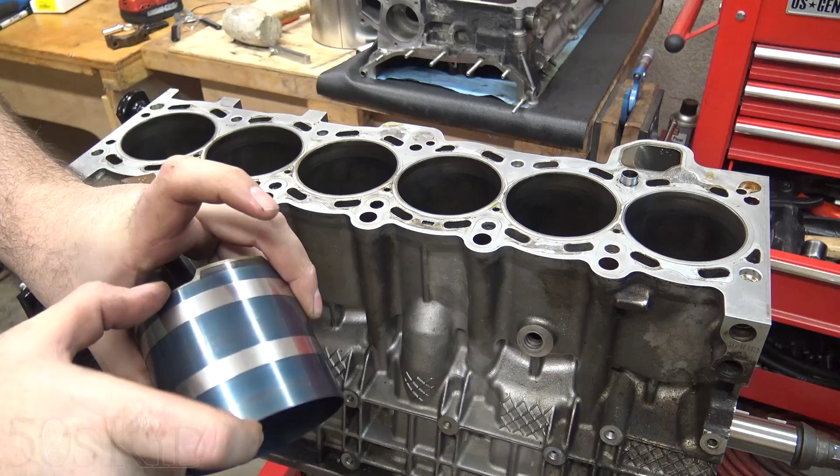So I've got my ring compressor on there, and I've got the skirts sticking out just a little bit, and I've got it compressed until it won't go anymore. You've got to make sure that you've got the little parts of the compressor lined up. Again, we're just practicing proper procedure. So the arrow right here points towards the front of the engine. I've got a little oil in the cylinder already just to lubricate things. I don't have any oil on the compressor or on the piston rings or anything like that. And I'm going to take my mallet and tap down the compressor so that it's perfectly flush with the engine block.

And then just holding that, I'm just going to use my fingers to press the piston in. It's just that easy. I think the spring pressure of the rings is going to hold that piston in, and I'm just going to come down here and guide the connecting rod right onto the crank pin, just like that.

So we're using the green Plastigage. That's what you use. It goes between 1,000ths and 3,000ths. So I'm going to cut a piece to fit in there, and it looks like just that size piece will do. Plastigage, it's just a little piece of plastic that gets crushed. So we'll just sort of open it up, and we got to get that little piece of green plastic out of there. So we'll just lay it on top here.

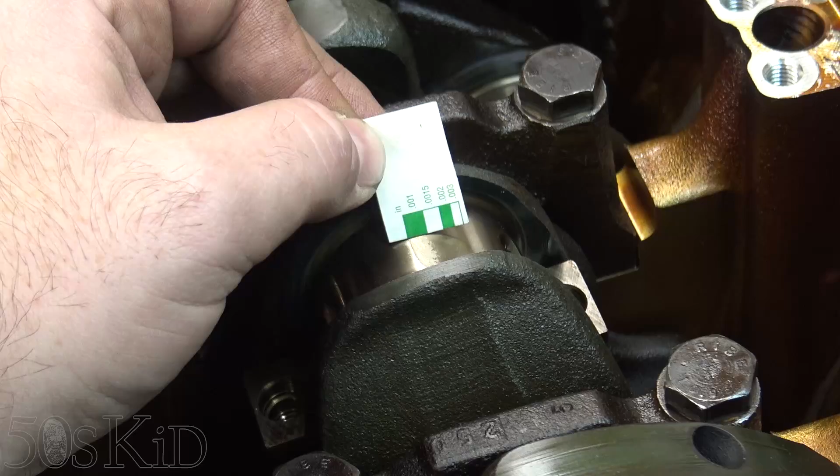And it looks like it sort of stayed on there, but some of it came off on the bearing as well, so maybe I shouldn't have really wiped off the oil. But there's enough to see. So you just hold the scale to the Plastigage and you see what lines up. You can clearly see that we're basically at 1/1000th of clearance, which is good. If it was 3/1000ths, then the Plastigauge wouldn't have been squished as much as it is. So with these old bearings, we got 1/1000th of clearance, and that is within our spec. So we're all good there.

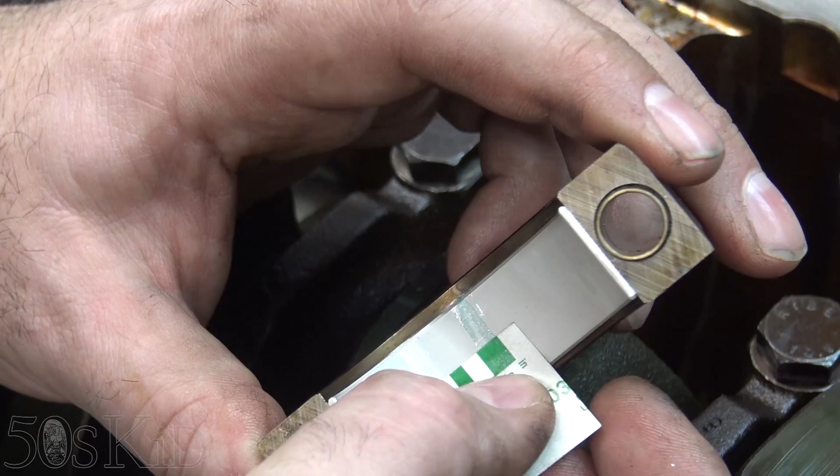So now what I want to do is put my new connecting rod bearings in there and see what the clearance is on those. Okay, I just Plastigaged the new bearings and it looks like they're about the same. It's kind of hard to tell because some of the Plastigauge came off on the bearing too. So if I'm measuring the bearing side, it looks like 1/1000th of clearance as well. So the bearings are good. Bearing clearances are going to be good.

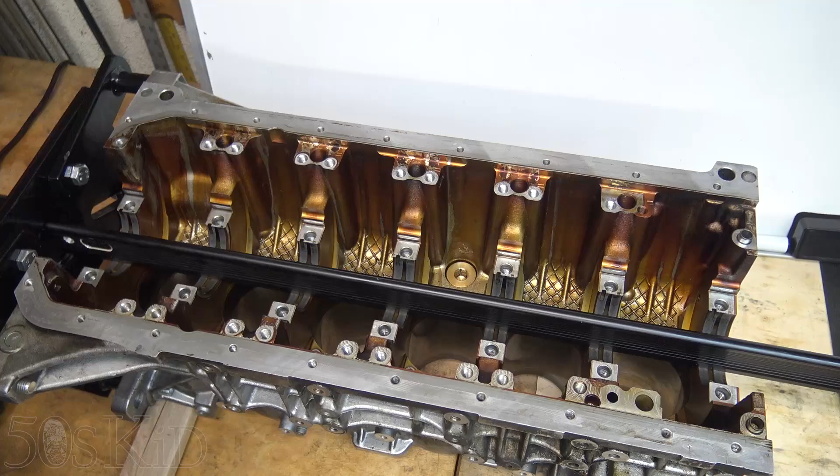So I've got the block off the engine stand and resting on my workbenches here. And I'm using my straight edge to check and see if there's any warpage in this block this way or that way. I've got it aligned by eye as best I can. I'm going to use my thinnest feeler gauge, which is 1.6 thousandths. Try to slip that in. You can see it's not going there, or there, or there, or there. So there's no warpage in this block. These main bearing bores do not need to be align honed at the machine shop. So that is very good.

You absolutely need to pull this engine off of the stand. If I did this with the engine on the stand, the block would actually flex down this way, especially an inline 6 block. Even cast iron blocks would flex. So you want to pull them off the stand and put them on a workbench whenever you do this. Ideally, you're supposed to have a precision ground round bar that you would use to measure this with, but you can use a straight edge as long as you don't have it cocked to the side. If I cock it to the side, I'd be able to get a feeler gauge through there. So you just want to make sure that you're absolutely as straight as possible, and you'll be able to do this test and do this check.

I didn't think that these would be warped. I think if we had seen warpage in the block, we would have seen excessive wear along the bearings when we were looking at them. We would have seen like a dish pattern in the bearings maybe. So I didn't think that this test would fail, but it's good to just check just in case.

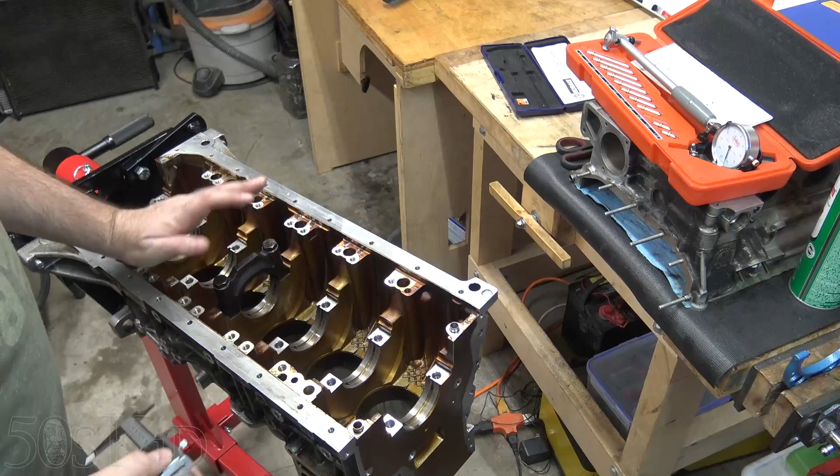So one last thing, guys. I went ahead and I put the main cap back on without the bearings in this time, and I just used my calipers to measure what that opening was, and it was about 2.555 inches. And then I set my outside micrometer to that, and I kind of zeroed out my dial bore gauge roughly at that.

What I'm doing is I'm measuring, and I just want to see. I want to check for out of roundness, or I want to check for a difference between this side of the cap and the other side, so both sides of those oil holes. And the reason I want to do this is because when I mic'd that new bearing, we did see a difference between one side and the other. We saw that that new bearing was sort of tapered. The old bearing wasn't, but the new bearing was.

And so I was thinking to myself, well, it might be that this main bearing cap, the actual surface of it has become tapered, and that old bearing sort of got ground straight by the crankshaft. So what I'm doing is I'm checking here, and I've got about 4 thousandths there, and I just want to see the difference. I've got 4 thousandths there.

I'm going to turn it also and check at 45 degrees. So it looks like 4 thousandths, and yeah, that's actually 4 thousandths as well. We'll do the same thing, come back to the front half and check, and it's 4 there and 4 there as well. So okay, looks like that main bearing cap is fine. It's not tapered in any way. I just wanted to double check that based on what I was seeing.